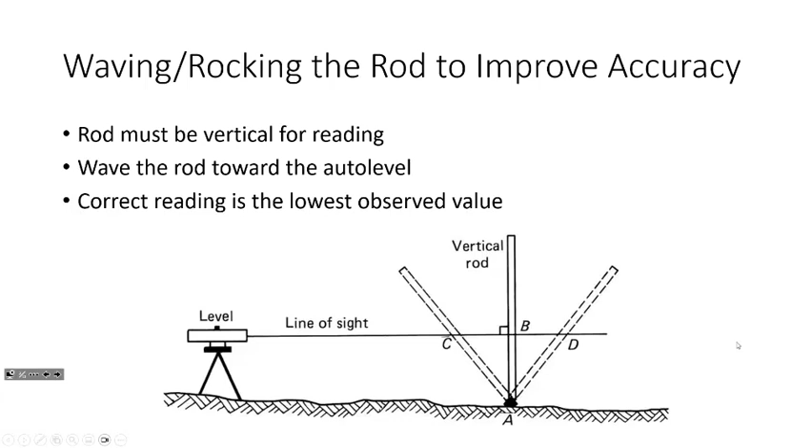you're wanting to read. So if you're rocking the rod, whoever's sighting the rod, they'll see the crosshair bounce up and down, and the lowest reading is the actual correct reading that they want to take. So rocking it can help improve accuracy, because whatever the lowest value is, that's the one that you want. Does that make sense? So that is a technique in the field.

Another thing, I think this happened to a couple of groups in the field Wednesday and Thursday, is that whenever you're setting up, make sure you're not setting up like this to where when you shoot the instrument towards it, you can't read the rod because the rod is too high, or the other way around, if you extend the rod all the way up and it's too low.

I don't think this happened too often, but there were some instances near that hill between Buskirk and where that field is in front of Old Main. You know what I'm talking about? That big sort of ridge hill in front of Buskirk. I think that happened to a few of you.

So yeah. I have decided that in lab this week, we're going to run the same loop that we did last week. I was thinking about doing different points, but I think we're going to do the same ones, but we're going to do a weighted adjustment. So it's going to be the same loop. From a field perspective, the only thing you're going to have to do is read all three wires. You'll see what I mean, and you'll see the advantages to that here in a bit.

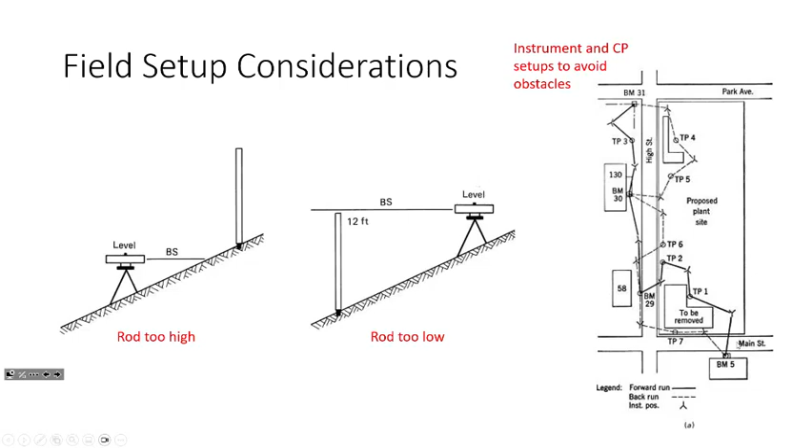Okay, let's talk about this actual error adjustment. It's a little bit more involved, but I think you'll find there's some intrinsic benefit to this approach. Now let's go back to the differential leveling loop that we did in class. If you remember in our previous lecture, we had one set of leveling data that was in the slides, and then we had another one that we did by hand. This is the one that was in the slides.

Now, this set of notes is a little different than the one that we had last time because there's some new data. When we collected data in the field last week, all we were really collecting were backsights and foresights. Now we're collecting something else. For our backsight, we've got this new term, backsight distance. And over here, we've got foresight and foresight distances. These are the distance between the instrument and the backsight, and the instrument and the foresight.

How do you think we determine that in the field? The upper and lower stadia, right? So we read the upper wire, we read the lower wire, and then how do we determine the distance? The difference times 100, right? Because our instrument is calibrated such that every unit of difference corresponds to a 1 to 100 scale. So we can read all three wires and get the distance. Does that make sense? Okay.

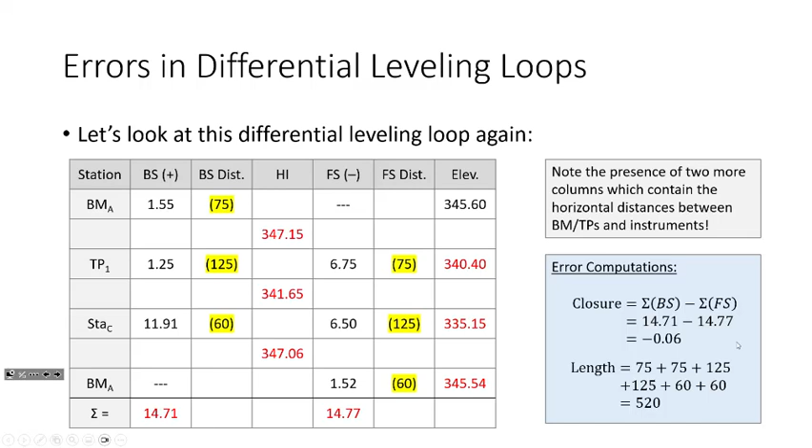So you keep doing that, and you can compute the total distance from backsight all the way back to the backsight again. It's just the sum of these numbers and the sum of these numbers. So it makes that calculation a lot easier. With me so far? Okay. Now, how do we do a weighted distribution of error?

Okay. Now, in an equal distribution of error, what we did is we took that closure and we said, okay, the closure is negative 0.06 and there's three setups. So we'll adjust each elevation by plus 0.02. Just take it and divide it by 3. We're not going to do that here. Instead, we're going to adjust the elevations by a ratio of the total distance from benchmark 1 to the total distance for the entire survey, okay?

And so we're gonna have a fraction that we compute for each setup, and then adjust that elevation accordingly. And so the final setup is gonna be the total horizontal distance on the bottom, but on the top, it's gonna be the horizontal distance from benchmark 1, but that's also gonna be the total horizontal distance because that's gonna be the end of the survey. And so we'll go back to our initial benchmark. Let me kind of show you how that works.

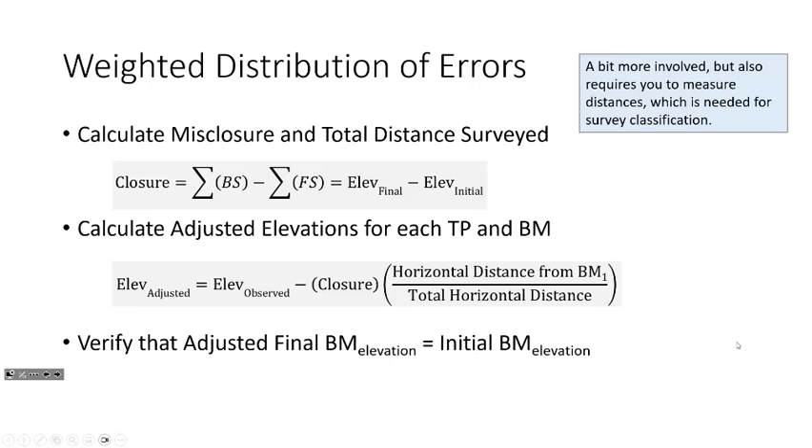All right, so let's take a look at this, okay? Now, your field notes are gonna be set up a little differently. When you do this in the field, you're gonna have your backsights. When you record your horizontal distance, usually you're not gonna be able to record that distance directly. Instead, I want you to record the upper and the lower stadia. You'll see why here in a bit. Again, I don't want to get too far into information overload.

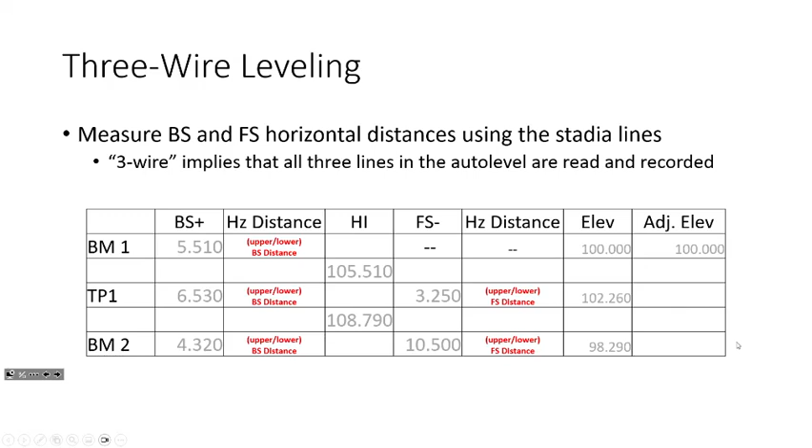When we do our example here in a second, you're going to see this number slash a number here. Those are the upper and lower stadia. You'll see what I mean. Now let me show you how a weighted distribution of error works. Okay, so here's my log book. I've got my backsight distances, foresight distances. But notice here how I've got the heights of the instrument and the elevations already computed. We don't do that any differently than we did before, okay?

Everybody with me so far? Nothing's changed there. Now, here's what I'm gonna do. Remind me, what was the total length of the survey? Everybody remember what that was? 520. So the total length of the survey is 520, okay? How far is it from our first benchmark to right here? Does anybody know that? 150. 150, because it's 75 and 75, right? Okay, so we'll say our first distance is 150, okay?

So what I'm gonna do for this elevation is as follows. My closure here is negative 0.06. So I'm going to take this elevation and adjust it. I'm going to take 0.06 and multiply it by a ratio. And that ratio is going to be the distance that I traveled divided by the entire distance for the entire survey, okay? And what happens is that elevation goes up a little bit.

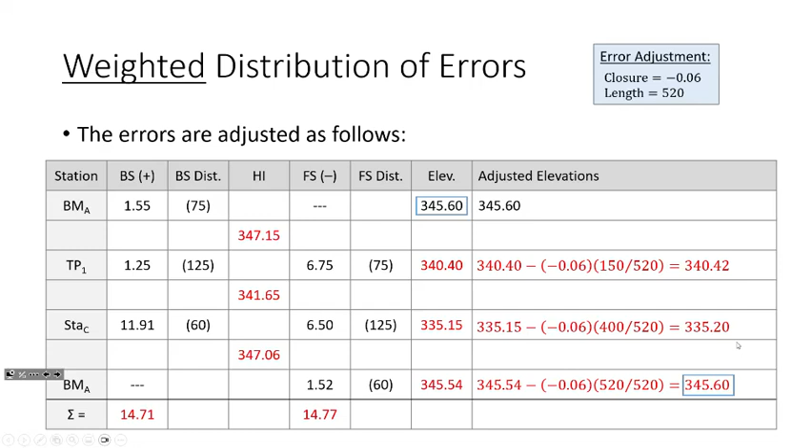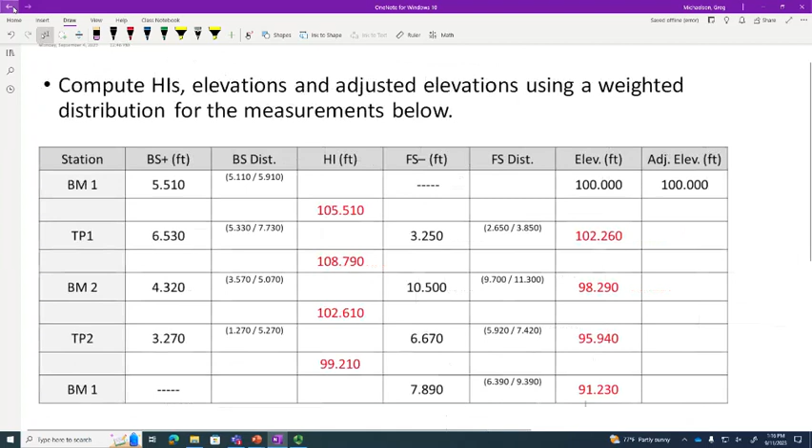Okay, so let's look at a differential level example, and this is going to be a weighted distribution. Okay, so here's our field notes. Now, just to be clear, this is the exact same example that we did last time. So if you go back to the notes, this is the example that we did in class on Wednesday. These are the exact same measurements that we did last time.

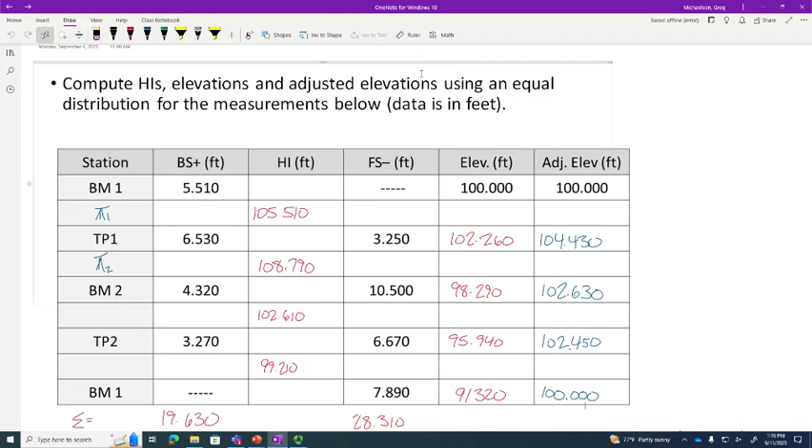So if you see here this height of instrument, this 105.51, 108.79, exact same data over here, nothing changed. The only difference is that I'm adding these backsight distances and these foresight distances. So these heights of instruments and these elevations, same thing as we did before in class. With me so far? So we're going to do a weighted adjustment, or a weighted distribution of error. And I'm trying to do this the way that you would do it in the field so that the experience matches.

So far so good? Now, I want to start with these backsight distances, and I want to look at this one right here. Help me out. So I've got here the lower stadia and the upper stadia. The lower wire was 5.11, the upper wire was 5.91. So what's the difference between them? Times 100? 80. Right. Yeah, so 80, okay? So I propose that this distance is 80 feet. Does that make sense? Everybody with me on that?

Now, before we move on, I want to talk about this other added value of this type of level, this 3-wire leveling. I want to look at these numbers right here, and compare them over here. What this data is showing is that when you're out there in the field and you're eyepiecing this thing, you read this as 5.510. And you read this as what? 5.910. And what about this? Okay, so help me out. What is the distance here? What is that variation? 0.400, right? What about this one? 0.400.

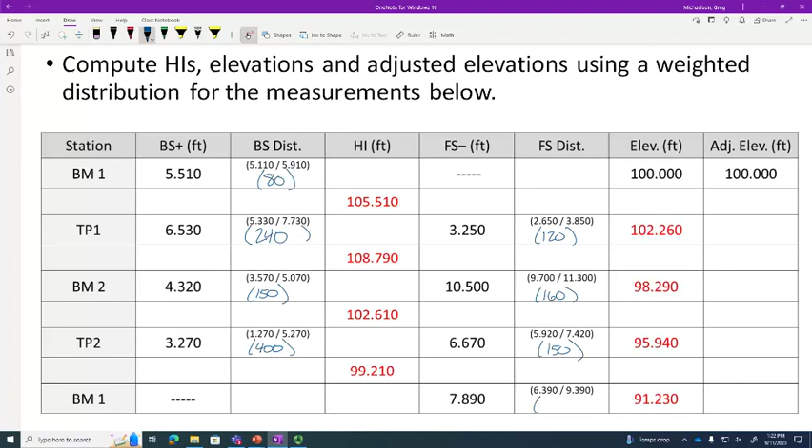What do we got for that one? 120. All right, what about the next one? Somebody else. Somebody over here. 160. All right. Somebody over here on the third one, somebody over here for the fourth one. So it's 5.92 and 7.42. 150. Okay. Over here, last one. 6.39, 9.39. 300. There we go. Now we're making something happen. Does that make sense?

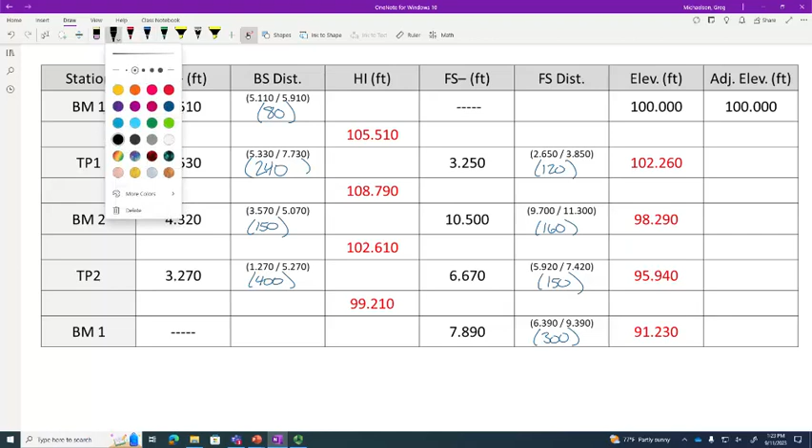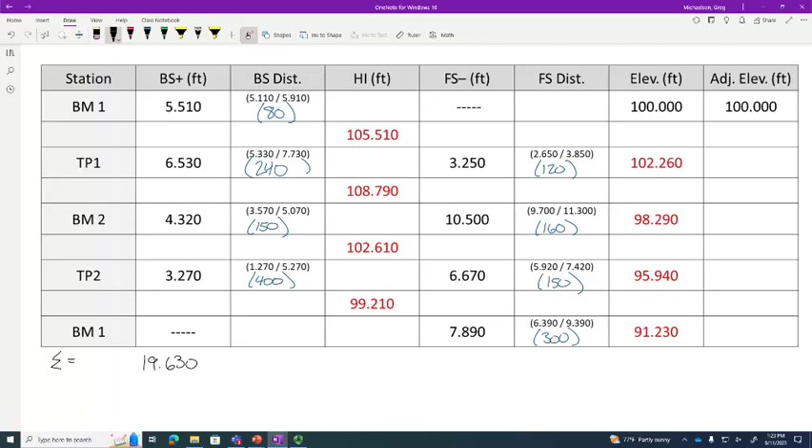So again, this is why I like this method a little better. Now, one thing I am going to help you out with, because we already did this before: we're going to put a summation column down here at the bottom. And we already summed our backsights and foresights. Here we got 19.630. Here we got 28.310. Now, a couple things I'm going to check. So let's do our page check. So we'll do this right here.

So if I sum up the backsights minus summing up the foresights, what do I get? 19.63 minus 28.310. What is that? Make sure we're all paying attention. Negative 8.680. Okay, what about elevation final minus elevation initial? So 91.23 minus 100. Did we get that right? Do we have a typo in here somewhere? They're not the same. I know what the problem is. This is supposed to be 320. See, these page checks matter. This is why you do this.

And notice how you don't erase. I see erasers in the field. No. I have a question about that whole erasing thing. I still don't understand, if you make an obvious mistake, like if somebody got 107. Don't do that. You don't erase field notes. But why? If it's obvious. Because it's a legal document. You don't alter a legal document. Now what do we get? Is this 8.68? Yeah. Okay, all right.

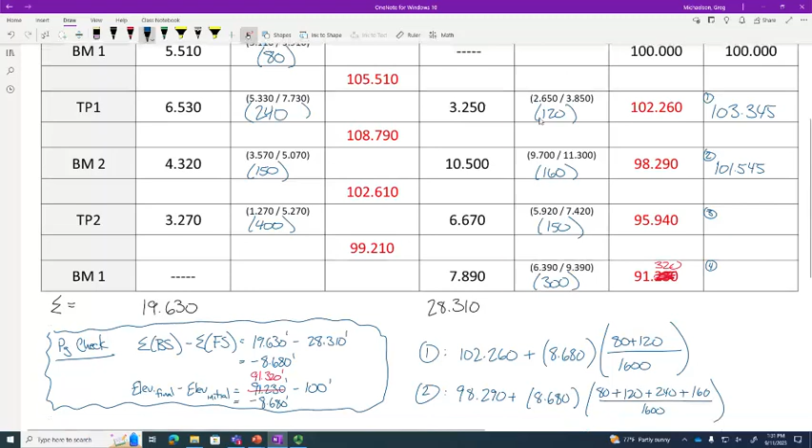Okay, so first off, without doing any math, what should our last one be? 100. But let's just check, okay? So it should be 91.320 plus a correction. And again, 1600, 80 plus 120 plus 240 plus 160 plus 150 plus 150 plus 400 plus 300.

And I'm doing this in a very formal, elongated fashion because as you get more comfortable with this, you won't need to do that. So, does this come out to 100? Yes. Okay. So, this is exactly 100.

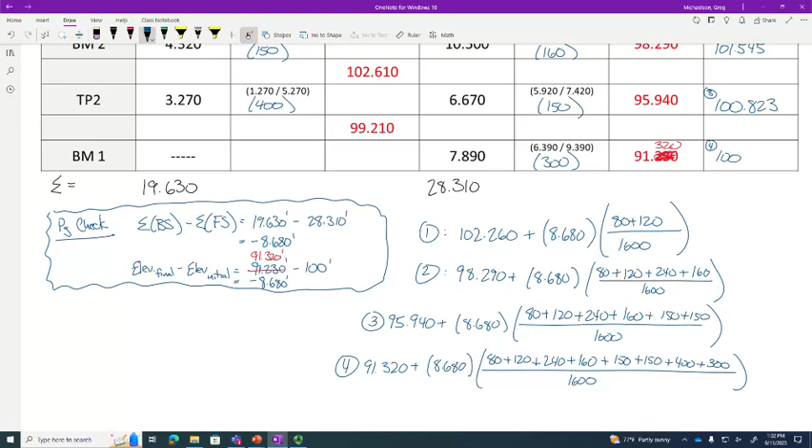All right. Let's take a second, digest this. I want you to tell me what you think. Any questions? This was the remaining question on the homework that we didn't cover. What about everything else between this and the rest of the homework? How are we feeling? Any questions?

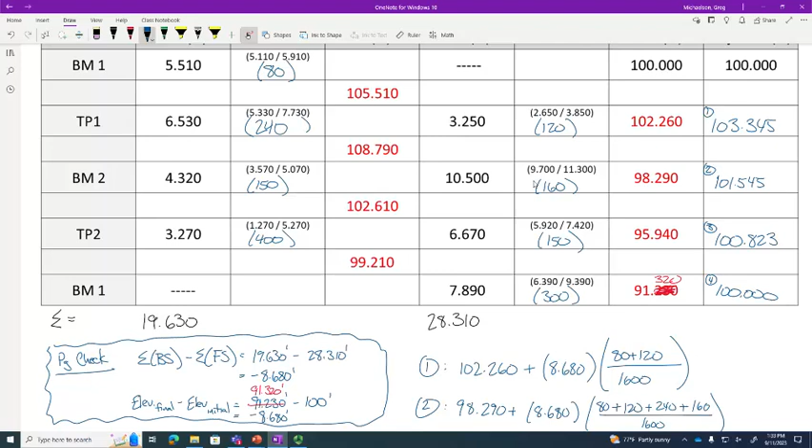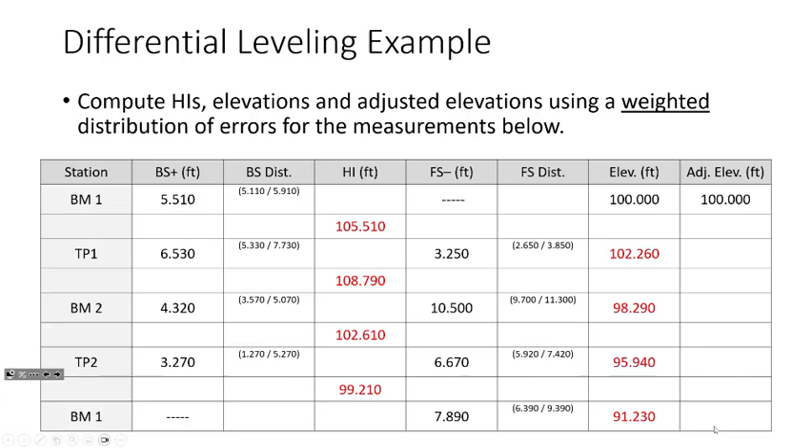Everybody good? I do want to mention one quick field application of leveling, just to make the point of where a differential level could be applied beyond just basic determination of elevations. I want to show you a simple example called a profile level. I'm not going to make you do this on homework or an exam. This is just for your edification.

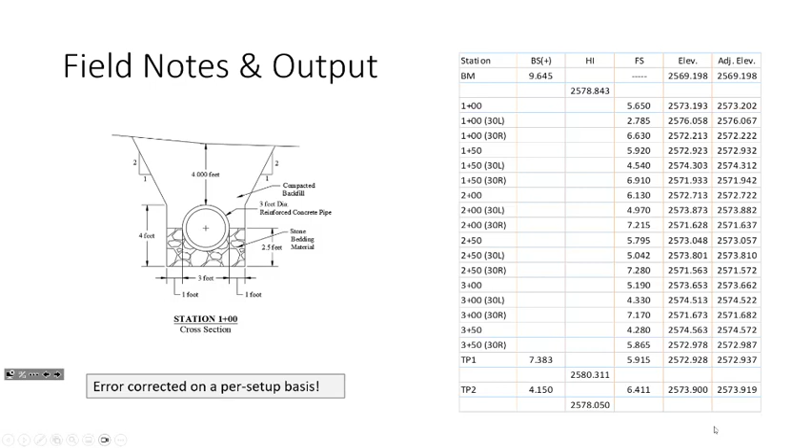It's a very simple setup because if you had line of sight for something like this, you could set up right here, take a benchmark backsight and just foresight everything in one shot. We couldn't do everything in this setup. We had to break a couple turning points because of the coverage and whatnot. But if you've got line of sight, you could do everything in one setup.

So you could go out there and collect all that data in a matter of 20, 30 minutes, depending upon how fast you were, go do your CAD work and your calculations and have the project done pretty easily. So it's a very simple but elegant real-world application of a differential level. Any questions on that? I just want to give you an aspect of where this could be applied in the real world.